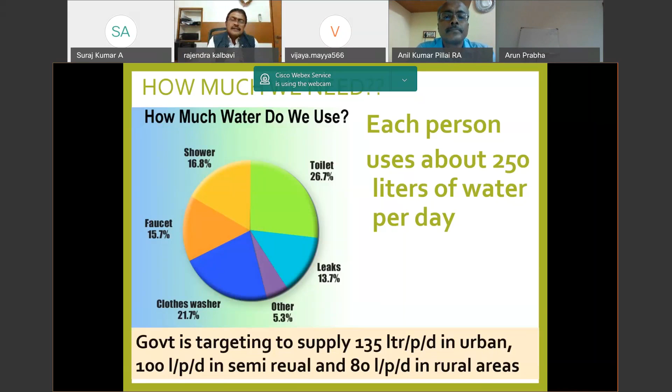Well, the 135 liters per day is only for 10 years, 15 years. It's all right. Exactly, we are struggling. The water problem is man-made. Even in our houses, in our offices, we draw water from our source. It might be a bore well or open well. Have we counted how much water we are using?

In any construction field, there is an inlet pipe, okay, or there is a bore well. Have we realized how much water we are drawing out from the existing bore well or open source? Nowhere is it done. So we need to take care of it. It is purely a man-made disaster. It's going to come if we don't awake. We need to awake immediately.

Chennai, not this year because of Corona and lockdown, there was not much hue and cry about water. Otherwise, last year there was a hue and cry about water in Chennai. For kilometers together, people were waiting for water to be supplied by their own municipality or the corporation. But is it the responsibility of the municipality or the corporation alone? We civil engineers, and as a common person, we are using the water. Don't we have any roles to play?

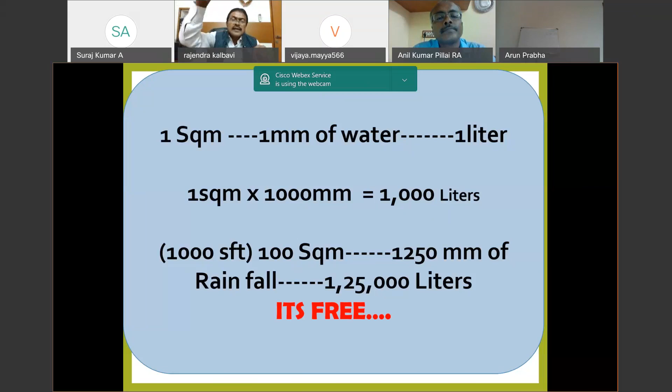So what we have to do? If we count it backwards, a 4-member family. I initially said that as per WHO, the World Health Organization, for man's basic hygienic needs, around 40 liters is enough. In the city, around 80 liters. Okay, we take 100 liters of water. That, I think, is more than sufficient for convenient living. If 4 members use 100 liters per day, for 1 year we need 1,46,000 liters only.

And what we are getting, I've already told you, is 1,25,000 liters annually on an average over India, so there is a shortfall. If we take care per head, around 17 liters per day, we can live our life very happily without relying on the supply of water from the corporation or the city. Okay, but what is our role? How are we serving this?

Friends, we always say catch the rain where it falls. It's very easy to say, but how? We are all engineers. We need to make the running water crawl. How to make it? I will tell you. And you make the crawling water stop. How to make the crawling water stop? That also I'll tell you. And once you make the crawling water stop, allow it to percolate. Give it its own time.

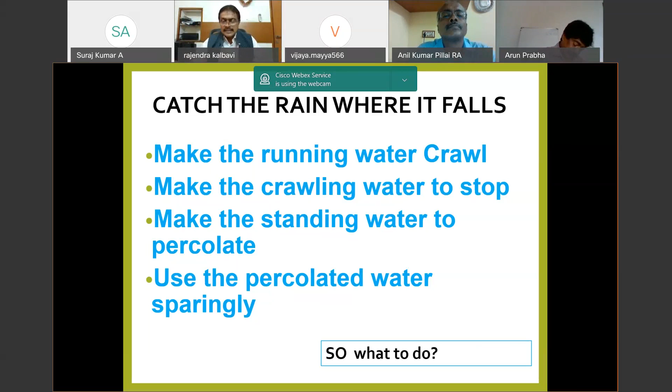Okay. Now, we always talk about harvesting. Why is water harvesting linked with the word harvesting?

Harvesting is basically an agricultural word. It is used as an agricultural term where the crop is taken and the right crop is separated and preserved, and it is used when the crop doesn't grow at all. Harvesting is the same thing. When there is rain, you get rain. Otherwise, no water in this world.

The entire water cycle all depends on how much water we get from mother nature. So we need to save it. Let's save it. So harvesting is that: preserve the water you get and use it when the water is not there. So what are the steps we need to take? So now let's get into business.

When there is rain, we need to collect as much water as possible, whether it might be dams or our reservoirs, lakes, or our own open well. This is where civil engineers play a very major role. Then the bore well recharge, that's a deep aquifer recharge, groundwater recharge, and we have water bodies, watershed development, efficient use.

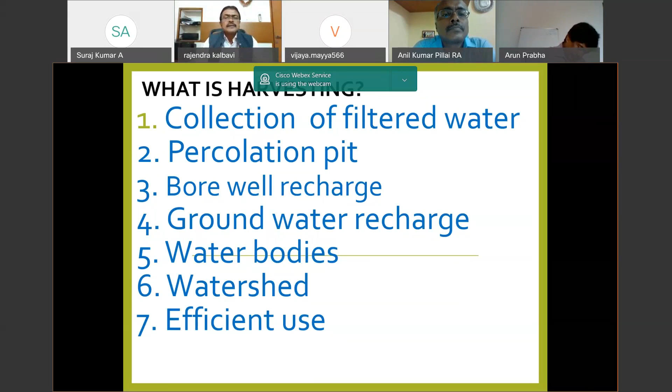This is roughly, I'm telling you, there are other areas also, like recycling of water. We'll talk about that later. This is basically for civil engineers. So, my friends, in my episode Water is Life, the sixth episode will tell you the basics of rainwater harvesting. You can just go through it whenever you have free time.

There's a small video which tells you when there is rain, how do we collect rain? Where do we collect rain? And what... The video tells you catch the water where it falls, with whatever items you get, and wherever you get water. Rainwater belongs to each one of us. So that is why we need to know how to keep it and share it with our friends. That is why, friends, catch the rain where it falls. I'm sorry. The rain where it falls. That's our principle. Very simple.

Now let me quickly go through the different methods. You need to collect the different drains coming out from your roof. It might be a slab roof or a tile roof, both our own buildings. And don't feel that your building is getting spoiled with connections. You can cleanly paint them your required colors and bring them down near your source. And there is a sump tank here. Before letting it into the sump tank, you need to have a first flush or first drain separator.

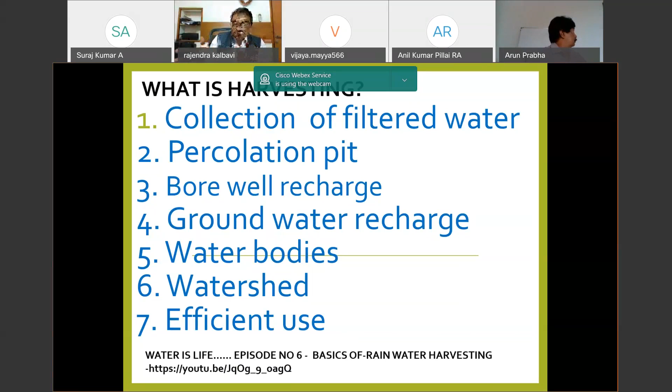This is the first flush one. Once the first flush is over, allow it to pass through a filter, then you can collect it. This is my introductory video; my videos start with this introduction and will tell you the different methods available. And number 17 will tell you why the first flush is important. The first flush details are there. And now coming to the filter. You need to filter the water and save it. Now, this is for the common.

I think there has been a connection problem. Yeah, I think we have lost Kalbavi, sir. Yeah. I will try calling him, sir. Okay, no problem. He will be rectifying it. No need to call. Sure. I think he'll come back. Oh, thank you. I think we will take some time till the speaker comes back.

We have been talking about various ways to harvest water through different techniques, which is really very interesting. So each one of us can follow the technique which is there.

I lost contact. I don't know why. Okay. So you'll have to share again. Share again. Yes, you have to share again because once the connection is gone. Yeah, now it's okay. Now see here. I don't know where I lost connection.

Yes. Anyway, these are the types of filters available, friends. To know more about the filters, we have this episode which will tell you how you can use them, and each filter has its own positive aspects and negative aspects also. So you need to take care of these filters by clearly understanding them and asking the manufacturer how we can maintain it in the long run and how we can clean it now and then.

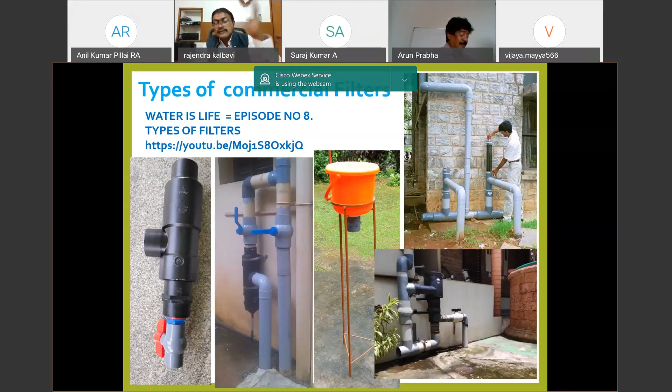But every filter may not have a first flush, so you need to have a first flush also. Some filters have the first flush along with them, and this one doesn't need a first flush at all. So depending on the type of filter you purchase, the cost varies from 3,000 to 7,000 rupees for an ordinary house.

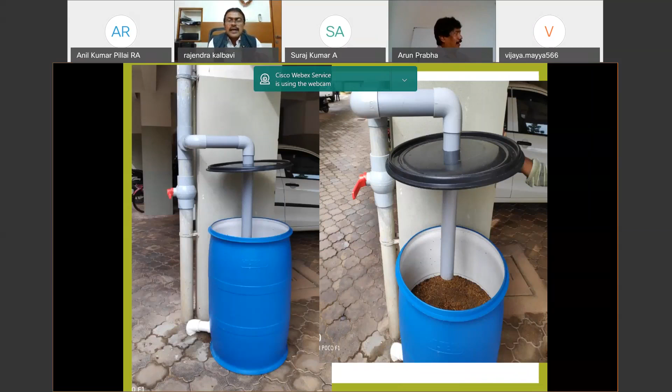The best thing is like how Mother Earth filters our own water. The same way you can have a sand bed filter. This is a sand bed filter. Making a sand bed filter is very easy. You have a big box; at the bottom, have jelly of 20 mm, then 6 mm. Then you have the coarse sand. Then you have a layer of Netlon mesh.

Above that, you put around 4 to 6 inches, depending on your availability, of what is called charcoal. Once the charcoal is over, put another layer of Netlon mesh or aqua mesh. Then you put 6 mm baby jelly on the top. Allow around 1.5 feet at the top, so that there's space available for water to collect if there is heavy rain.

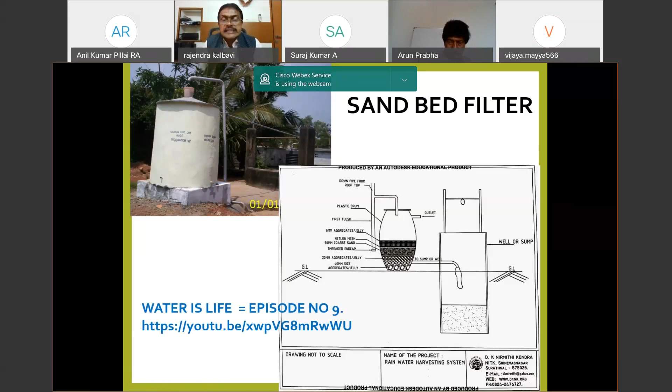So this is very simple. It can be made by yourself at your house, and for large buildings and apartments, and this is also used for reusing water at our construction site. So if you have a small house, you can make it by your own method, because you regularly maintain it and see it.

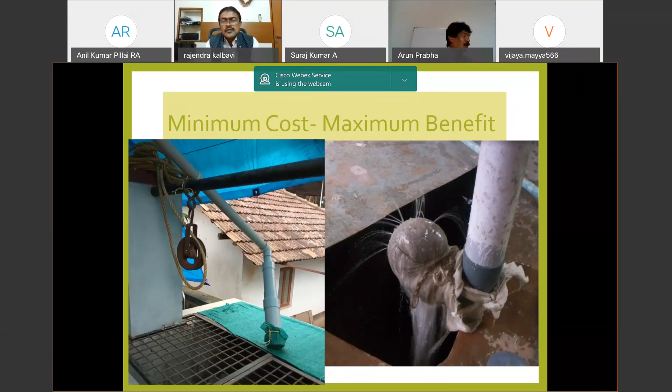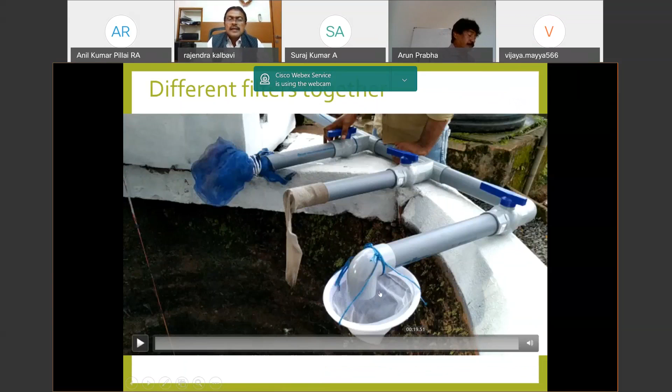Okay. Now this is my house, where the water comes from different types of roofs. We need not collect the entire water from all your roofs. Where it is not possible, where you don't get a proper gradient for your downtake pipe, just leave it. Whatever is possible, pass it through. This is the first flush; allow the first water to go once the heavy rain starts. Once the monsoon rain starts, close this, so water will start rising, get filtered and get into your well.

You can store it in your sump tank, or in your well. If you store it in a tank and it is closed, I have tested this at NIT Surathkal, we could save this water for at least 6 to 8 months. 6 months, absolutely no problem. And we have regions in North India, especially in Rajasthan, where they have saved it for up to 8 to 10 months.

And there are examples in Mangalore where we have found old wells while renovating. The smart city project has come and we find wells here and there. One well was around 30 to 50 feet deep, and the water quality was good, and it was closed around 10 to 40 years back. In other words, probably even after 100 years, the water will be pure.

Well, the thing is, I've been drinking rainwater without filtering or heating in my house. I drink direct well water, for the past 15 years. Absolutely no health problems, no cold, cough, nothing.

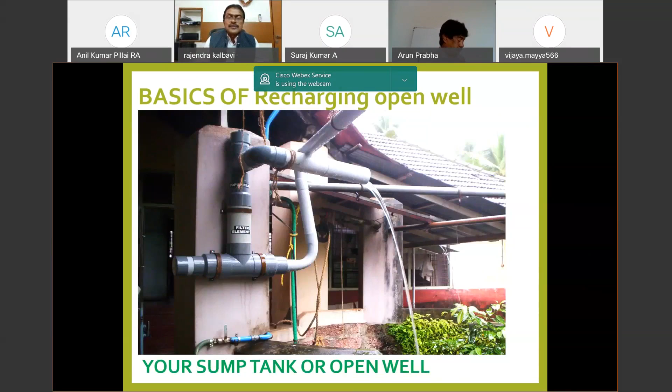And one friend of mine who came and tested my well water said it contains a lot of minerals, so you're lucky. Absolutely no issues. Well, these are very simple methods for individual housing. Engineers need not worry about this.

Now let's think about this. This is very important. This is my office. At a construction site, we have a lot of water being wasted here and there, especially the curing water, the water used during concreting; laborers use a lot of water. If you allow the water to go to a percolation pit, this water will go into the ground. It will not go waste or be stagnated anywhere.

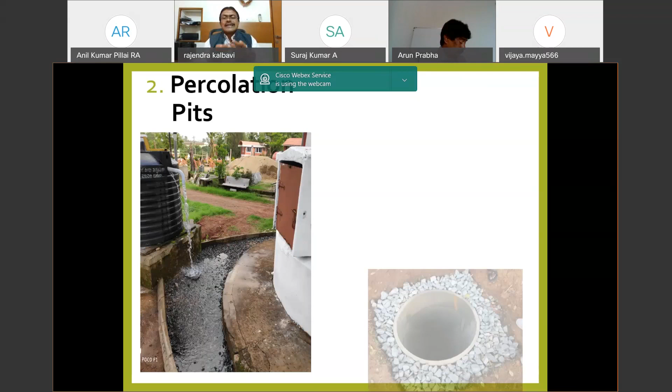A percolation pit can be done like this also. And if it is allowed to go inside, your site will be clean, there will be no foul smell around, and water will get into the deep ground and help to improve the groundwater table. You don't need to bother about filtration methods either, because the natural earth has its own filtration methods.

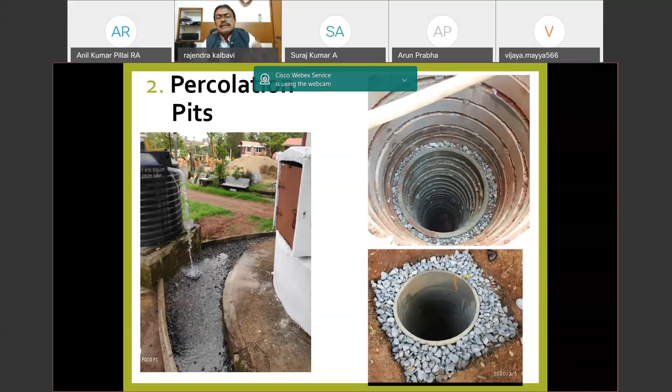See here, this is near a big building. I have designed a percolation pit, which is around 20 feet deep and 5 feet wide. All this water will go inside the well only. Absolutely no problem. So how can you do it? Just see, even a small house can do a percolation pit and save the water.

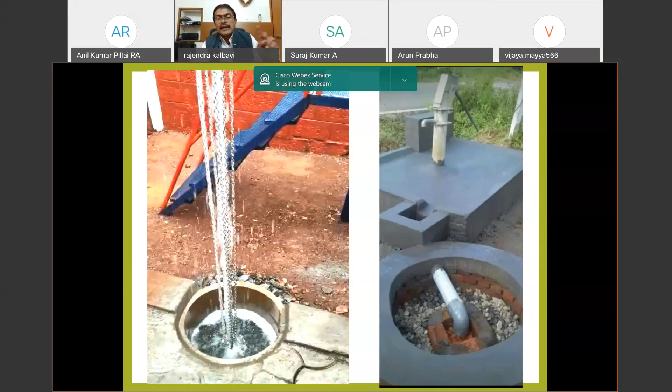And if you have a construction site, allow all your workers to wash their hands in such a place, do a percolation pit and save the water. In fact, after the percolation pit, if you want to store it, you can reuse it: after the filtration, you save it in a tank, and that water can be used for curing and other purposes also. Absolutely no issues.

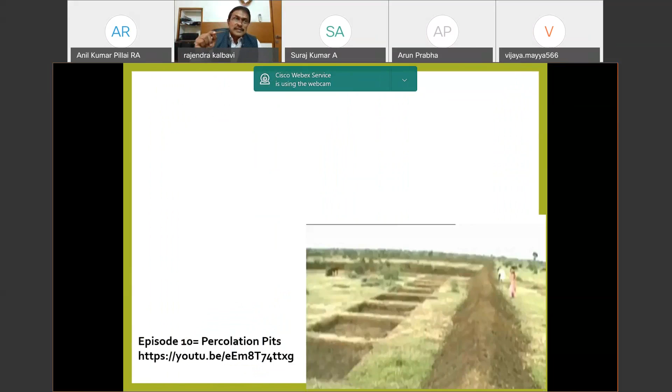As far as the concrete design is concerned, the concrete designer tells you what water cement ratio to use, and Pillai sir has already told you a lot of effort has gone into saving water in that, and you need to follow that principle so that the right quantity of water enters into the cement. The water has to come from the ground, so you have a lot of methods of percolation pits.

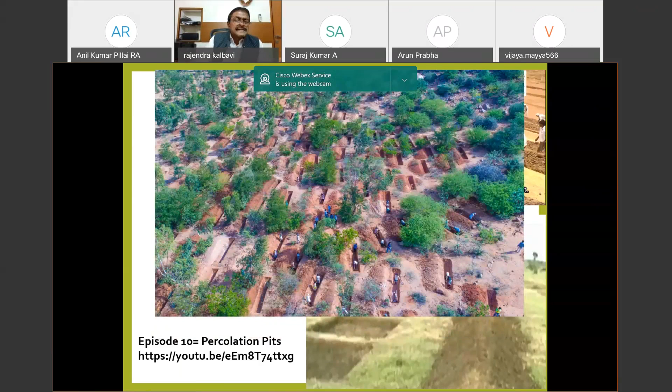The bottom one is in Rajasthan, where the choka system has been done to save water. And this is in Maharashtra, where the hill has been dug with a lot of trenches to save water. And this is in Koppal, a dry district, where a forest officer has done a lot to save water through percolation and allow water to go into the ground.

In India, you can adopt this method also, but depending on the quantity of water coming from the roof, you can increase the number of bins, and you can increase the size of the pit also. If you don't want it to be seen, you cover it with sand, and you can cover it with grass later. Absolutely no problem.

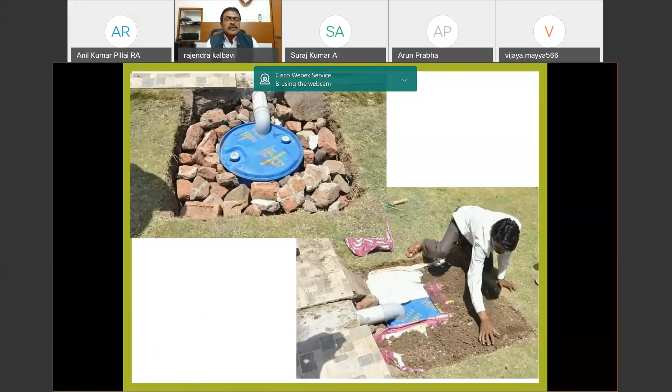Now, the main topic is recharging the borewell. The borewell has come very recently, 40 to 60 years back. Earlier, water meant a well or a pond or a stream. Somewhere around the 60s and 70s, people thought, because we have a drilling machine, why don't we go a little bit deep and get the water below the ground level? And we have geologists who will source the water.

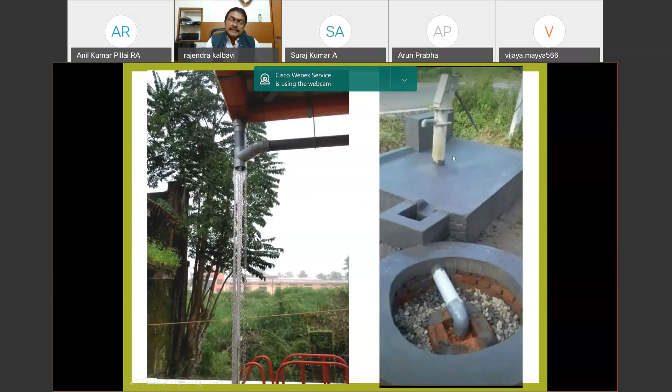Once we went deep, earlier it was only a hand pump, like I've shown here. You could draw whatever water you want, and this system was adopted for drinking water purposes only. Slowly, what happened? We had a fantastic idea of introducing a pump into the borewell. And this is the problem. Once we started putting pumps into borewells, a lot of water started coming out.

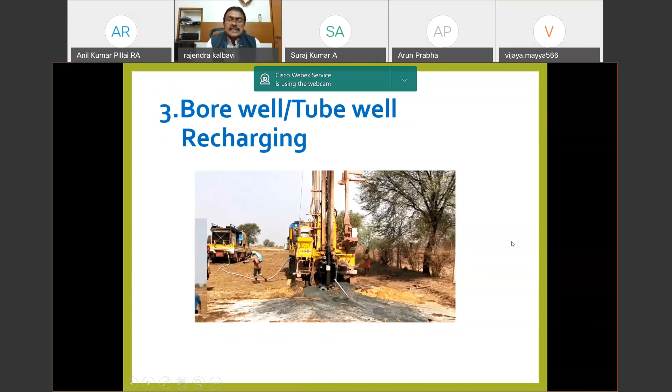If we use that water, you know what happens: nearby open wells will slowly dry up, because there is a cone of depression happening, and the open wells will get dried up. That's why we need to save the water, especially in the summer. We only have to use the borewell if the water is not there.

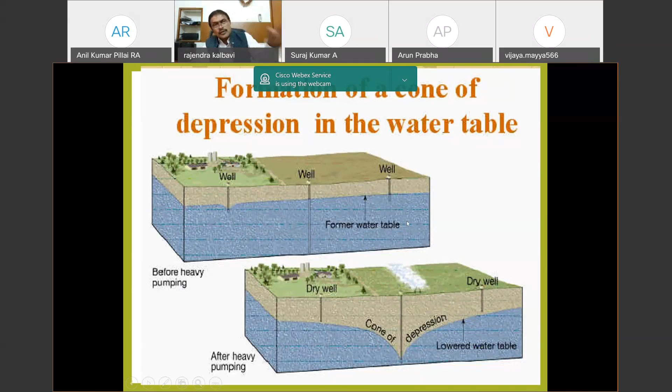If the open wells do not dry, you need to use open wells only. Well, how to recharge the borewell? Okay, this is your well. Dig, say, around 10 feet by 10 feet dia. There are different methods adopted. Some adopt twin pit methods, and some adopt injection wells.

This is the common system adopted in the southern parts of India, especially the southern states, and it's easier and convenient. I will tell you a very simple procedure of recharging a borewell. Dig a hole and strengthen the base, tie the top so that it won't tilt. Then slowly tighten, and you drill holes on the entire length of the pipe. The holes might be around 6 mm to 10 mm, and they can be in a random order.

Please do not drill the holes in a straight line. If you don't want to drill holes, you can make slits also. For the slits, 1 mm, 1.5 mm or 2 mm cutting blades are available. Using a 1 mm blade you can cut it, and the slit formation also has to be done in a random order. It should not be in a straight line from the bottom of the pit to the top of the borewell.

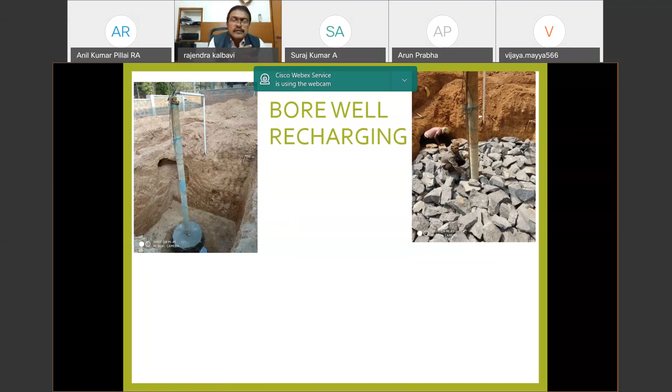Once the slits are made, you cover them with aqua mesh, or even netlon mesh is available. Aqua meshes are available, basically used for fishing. That is very, very helpful. You cover it with the aqua mesh. Then start filling the base with bigger size boulders.

You start with, say, 9 inches. Then you do 6 inches. Then 1.5 inches. Then you do 20 mm. Then you put 6 mm. All this you can put in layers of, say, 1 feet each. So already 6 feet is over. Then you cover the 6 mm layer with a nylon mesh again. This is called an aqua mesh or netlon mesh.

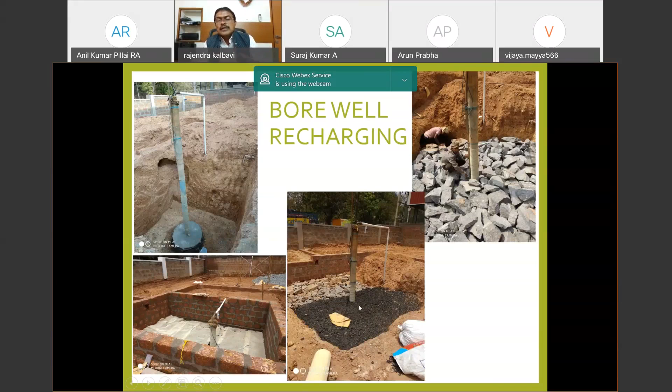Minimum 2 layers. Once you put 2 layers of aqua mesh, above that place 5 to 6 inches to 9 inches of charcoal. Charcoal will help to clean and preserve water for a long period. Because a lot of carbon content is there, it acts as a carbon filter. Once the charcoal is placed, again cover it with netlon mesh. Finally you place 6 mm metal on the top and allow the water from the buildings.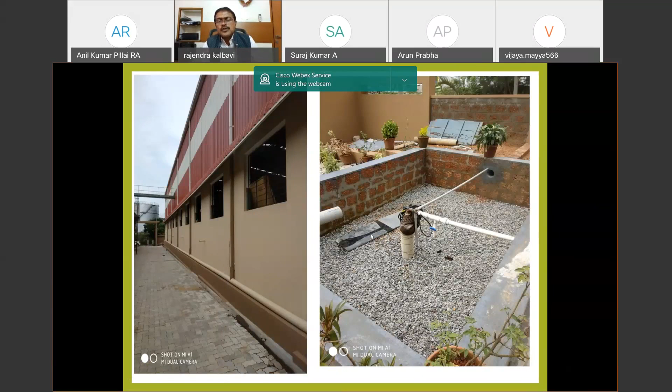If this is done for a very huge factory, and lakhs of liters of water are allowed to percolate, the owner and all the laborers are happy because they have lakhs and lakhs of liters of water. They are contributing to nature. What they remove from the borewell, they are contributing back to nature during the rainy season. This method has helped to revive many dry borewells in the northern parts of Karnataka, because they have a lot of water and they use it only for

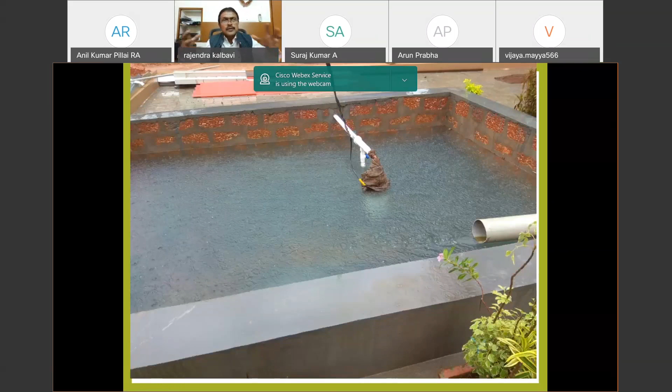There is a connection problem again.

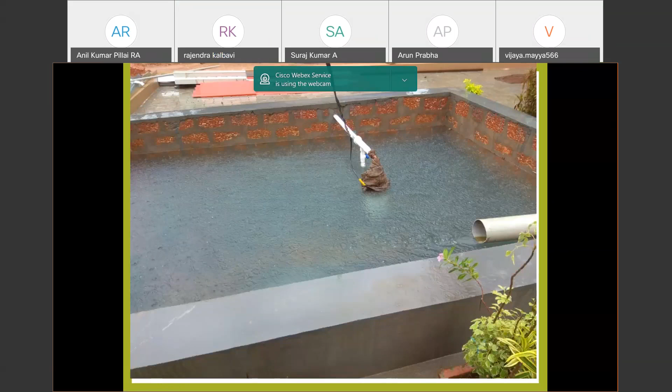It's very interesting to see that it's possible to conserve water, whether it is at a construction site or a residential building. There are so many methods, ranging from percolation pits to, of course, recharging borewells. It's very interesting to see that it's possible.

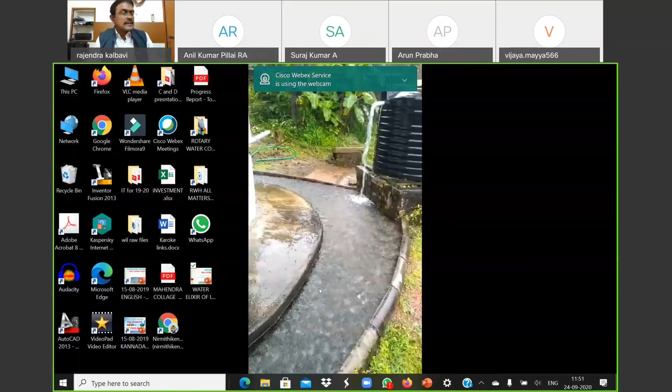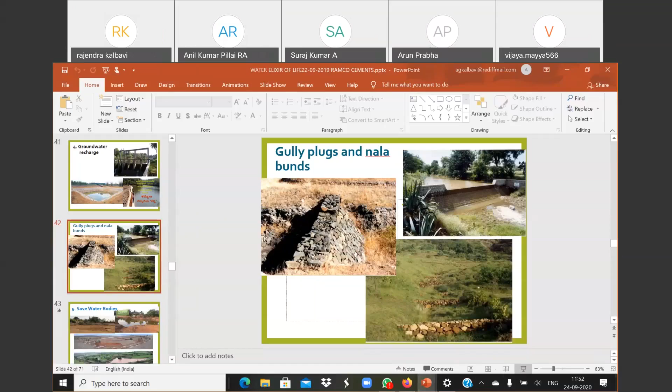So I'm sure that the speaker has come back, and we will get to hear some more. Hello? Yes, sir. Now you are back. Please continue, sir. Oh God, I don't know what is this internet problem here. It's all right. Okay, I need to share it. One sec. I lost my screen. Yeah, the Water Elixir of Life presentation is there on the desktop, so you can click on that. No, it's already open. Okay. Slideshow. Is it all right? Now it's visible? It's all right. We are able to see the slide.

Okay. Now we, being civil engineers, can play a larger role in conserving and preserving water. The main thing is, the water comes from nature for 4 months, and for the next 4 months it runs on the ground. It flows in the ground. And the other 4 months, it will be below the ground. So the role is very important during the first 4 months. And in the second 4 months, we play a very important role to make the water stop or crawl. How do you do that? So vented dams can be done. It's like this.

A lot of vented dams our engineers are doing, especially the watershed development boards, the Lake Development Authority, the Water Conservation Society, India Jal Shakti. A lot of them are working on this, having data on how to preserve and conserve water. But we as civil engineers, if we have our own friends' property or an association, we can join hands and build bunds like this, create a lake like this, and save water for the future.

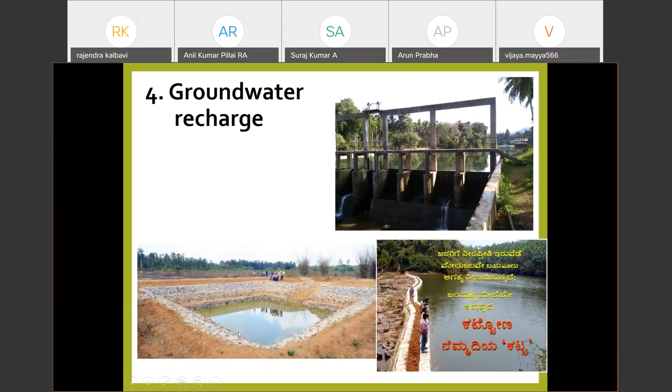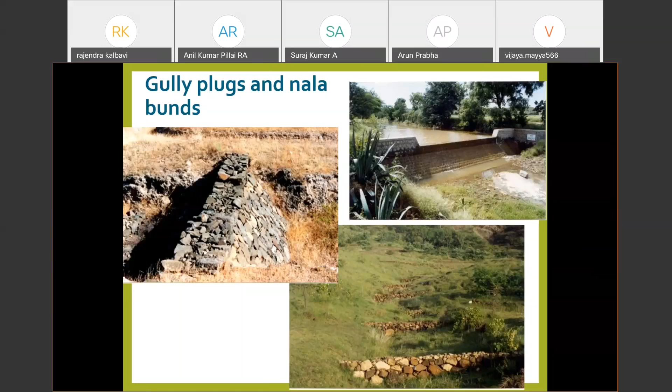These works are generally done by minor irrigation and other departments where they create bunds. This is done by the forest department, where they put gully plugs and nala bunds. The forest department does a lot, but they are not brought into the limelight. This is done by the forest department and farmers in other areas. They do it themselves to save water for their own purpose. There are various methods adopted by different farmers in their own manner to stop the flowing water and allow it to percolate into the ground. Now, this is very important. Available water bodies have to be saved. How do we save the available water bodies?

First thing is, we being the civil engineers should not prompt our own builder friends to encroach or occupy or dump or use dried lakes or dried wells, or it might be a dried stream. We should try to rejuvenate it. This is a very difficult task, and a lot of political pressure might also be there.

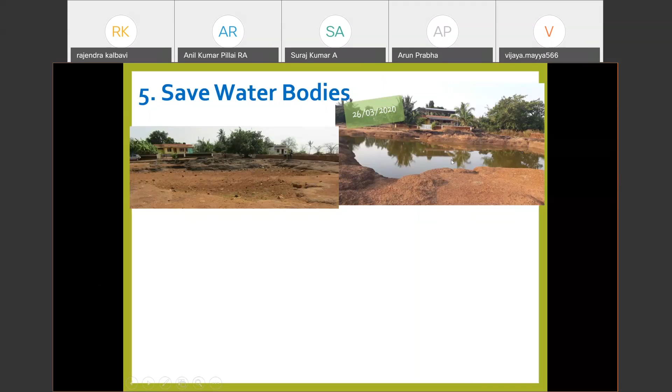So we need to overcome all these things, and we need to work on this and tell them we need to save water. If efforts are made, you can see the light at the end of the tunnel. A lot of efforts are being made in different parts of the country by different people. Different industries are funding. A lot of industries, with a lot of CSR grants, the social responsibility grants, fund water rejuvenation projects.

This is a water rejuvenation project. You can see how dry it was, and after the well was rejuvenated, you can see the greenery that has developed. You can see a lot of life everywhere. And lake rejuvenation projects are also being taken up by various smart cities projects and the minor irrigation department. They are doing their best, but how far are we taking care of it?

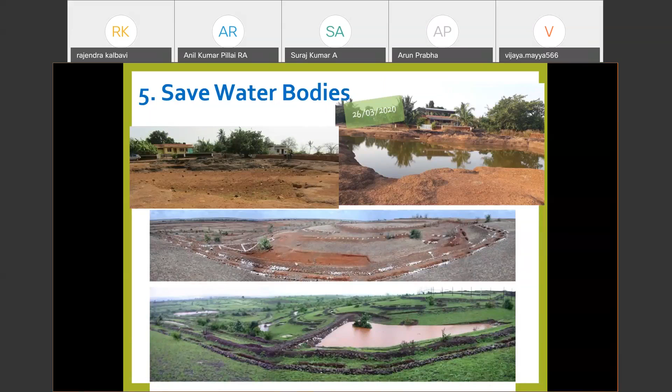What is our role? See, this is the problem. We don't know how to take care of our own water source. We dump all the garbage, and poor fellows, they don't know they drink water from this well. From age old times, the kings, Rajas, Maharajas have taught us you need to have a water source within your own building. You need to save and preserve water depending on your size and the capacity available. We have forgotten all these things. And we started dumping the waste, we started encroaching, we started occupying, and finally the water source itself is lost.

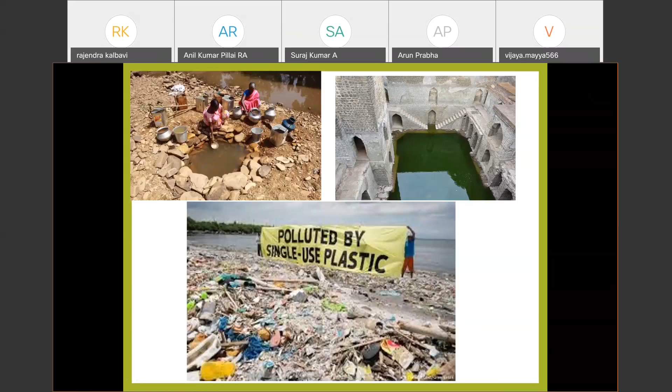Here also we play a very important role in saving or conserving water. Watershed development is one more area where civil engineers and of course environmentalists play a very important role. Many civil engineers did not get an explanation of what watershed development is. A watershed is an area where water lands up and goes into a particular stream or particular flow of water. And if you have a bund or nala in that particular area, you can store lots and lots of water. Well, that's a very important thing.

But nowadays, what's happening? Trees are not being grown, and trees are being cut for some vested interest. We need to grow a lot of trees in this city. Thousands and thousands of trees have to be grown so that these trees will retain water and give it to us.

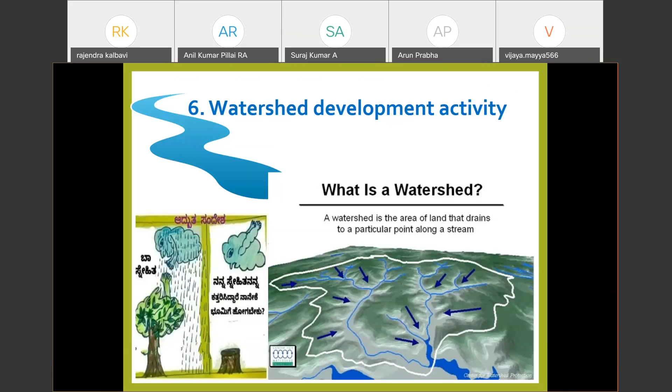And finally, I will come to the last point, which is save water. How do you save water? What are the methods involved? This gentleman in Chitradurga or somewhere has built so many, and the Prime Minister in his talk mentioned his name, that he has constructed around 7 lakes alone. And we have seen recently one man dug kilometers of a drain to get water to his place. People are doing their best in one or the other manner.

But what are we people doing in the cities? In the cities, we are using water according to our whims and fancies. When we go for a function or a meeting, there will be a water bottle kept for you. You just drink half of the water and then throw it away. And if you throw it away, what will happen? All the energy and money involved in utilizing that water, freezing it, filtering it, transporting it, getting it to your doorstep and to your meeting table, is all going into the drains later.

So now, if at all anybody gives you a water bottle during any meeting or function, whatever water you want to consume during the program or the meeting, consume it, and the balance water, please carry it and consume it wherever you want to, and dispose of the bottle very efficiently.

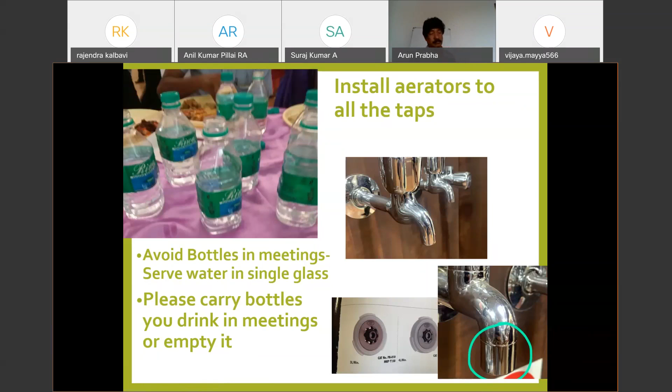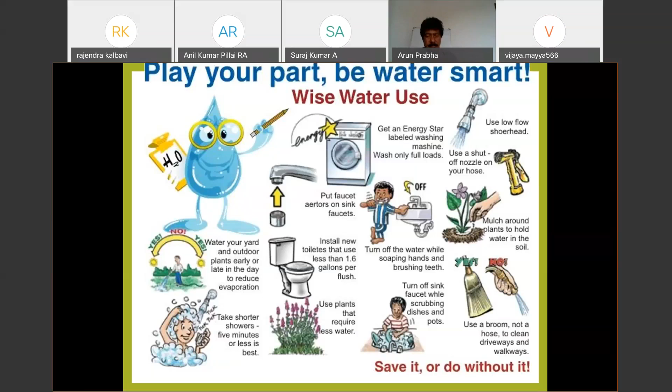And we are smart people. We have smart TV, smart mobiles, smartphones, smart ACs, and everything is smart. Lighting is smart. Our locking system is smart. When are we going to become water smart people? This is high time now. So we need to become water smart. I want to tell you how you have to save water in your own day-to-day life. You have a lot of methods, and there is a lot of information on the net. You can go through it and follow it one by one. That should come from the heart and not from somebody telling you or advising you.

Finally, water is money. Earlier, water was freely available. Now, water is money. Everywhere you are going to pay for the water. Now the government is giving water at a subsidized rate. In future, you have to pay a hefty amount to get water. Earlier days we used to say water is free. Now, water is not free. It comes at a cost. So how do we save water? How do we save money? Earlier we used to say time is money. No time, no money. That statement is also gone. It's older days. Now, no water, no money.

So, it behaves like a sponge. When it falls, the water will percolate to say 60 feet, 100 feet, 120 feet, 150 feet max in a given rainy season. So you have all the pleasure, you have all the right to take that water and use it very efficiently. You can do it.

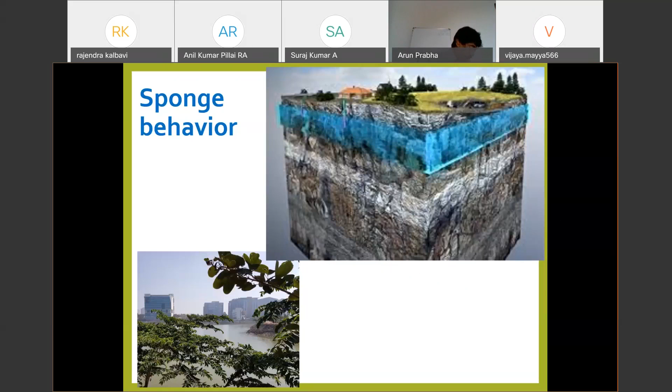But see, this is water. What is available on the surface? This is hard cash. Whatever water is available on the surface of the earth, it might be a spring, river, bund, nala, all these things are hard cash available. A cash company means a flourishing company. A water city is a flourishing city. We need to take this into mind. That's all hard cash. Don't you think this will help us? We don't have to bother for our living. A healthy life is rest assured. And if you have a water source like this, not only your health, your life will also be full of pleasure always.

Now, the cash, hard cash, money, rokra. We always talk about rokra. Now, we have SB account. What is SB account? SB account is your own open well or your underground water source. You collect it or put it into your open well and you take water according to your own requirement, like how you remove money from your SB ATM account, little by little, one by one. So it is like an SB account. If you don't recharge, your account will get empty. So you need to deposit water.

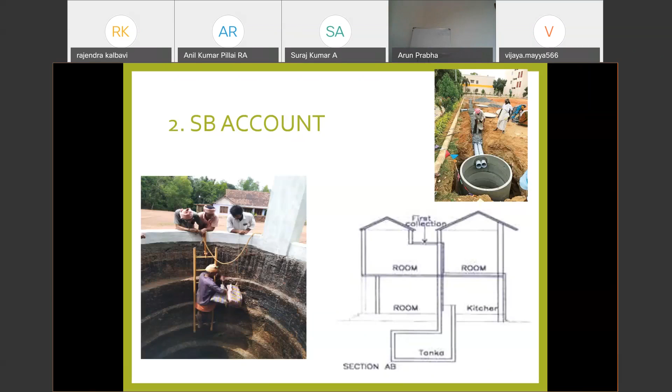And finally, what is FD? FD is hard cash where we deposit a large amount of money and keep it for a long time. Only if there is a crisis and we are in hard trouble, we touch our FD account. All the borewells are FD accounts. If we preserve the borewell and use it only when there is a crisis, we can lead a happy life.

You know what happened? In a big apartment, we have an open well, we have a borewell. Just because the developer has put a pump in the borewell, we don't bother to touch the open well. And in the rainy season, there is abundant water in the open well.

Just because the pump is inside the borewell, we use only borewells. Our surface water will go dry unnecessarily. So please don't do that. Put a small investment and put a pump in the open well also. Use it efficiently or effectively during the summer or during the rainy season. When the open well gets dried up, then no problem, then you go for a borewell also. I am not against the borewell, but effective use of borewell will help you to save, conserve and preserve water to a large extent.

In a construction site also, same problem. Rainy season is there, it was heavily raining. Instead of collecting roof water for curing purpose or construction purpose, we switch on the pump and take water from the underground water source. That is very, very bad.

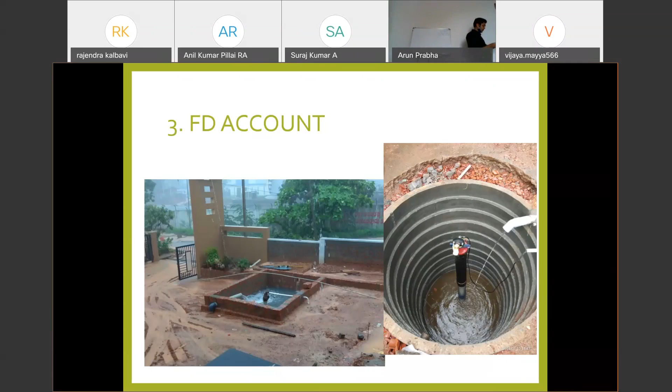Government is doing a lot. There is a Jal Shakti ministry, under that a lot of departments are there. Many, many departments are there. And apart from Jal Shakti ministry, government is also giving subsidies for individuals to build your own bore wells, your own wet wells, small pits under the NREGA scheme. Even at the Gram Panchayat level, they give a lot of schemes.

There is a country which has proved it, Israel. Water is recycled, even the grey water is recycled, and they say the world fights because of water, we are there to make friendship because of water. Make friendship with us, and we can have a wonderful living. Israel is a country which has only one river, and 60% of it is desert. Still, they are a water-rich country in the world.

Well, I think I need to wind up. I need to close my presentation as my time is getting out. Hello. Yes, sir. We are able to hear you. Yes, okay. We are able to hear you.

So, friends, for we humans to live happily, Jal, Zameen, and Jeevan have to go together. If we save Jal, Zameen will be very flourishing, and our Jeevan will be very happy. Even the trees know to save water. In the season they let the water go very fast, but once the rain stops, the leaves let the water drip by drip into Mother Earth. Only we human beings let it go freely through our drains. If we do like this, we will not have water for our future days. Let's act wisely to save water wherever possible, whichever possible, and however possible.

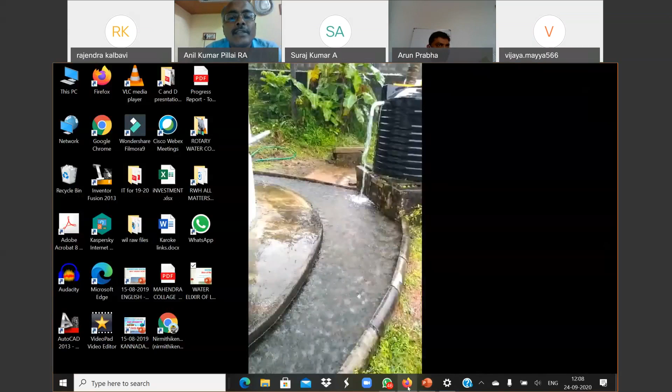Got it. Sir, I don't know what happened to my video. One sec. My video is not being seen. No problem, you can just go on, sir. If you can stop sharing and then show your video, it would be better, because we are able to see your computer screen. How do I stop sharing? Stop sharing is not there on top or bottom. Otherwise, you can just start the video. Is there a start video option? There is. You can start video. That's it.

Okay, sir. In an apartment, there will be a water source, it might be an open well or a bore well. To recharge a bore well, there are two arguments. One is we'll have a mechanical filter outside and let the water in directly from the top into the bore well. There are reservations about that, but some experts say it's okay. What I suggest is let it get into the bore well in a drip manner, in a slow manner. That is better. So the cost involved is very difficult to tell you. In an apartment building, the cost involved is only the recharge of the bore, because you already have the downtake pipe and a pipe system laid.